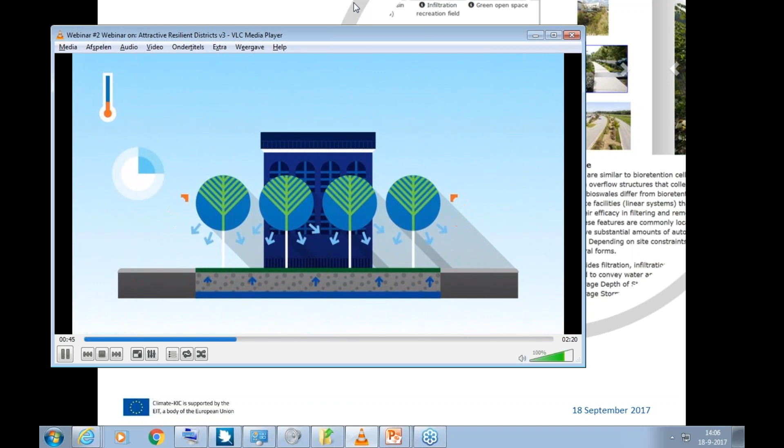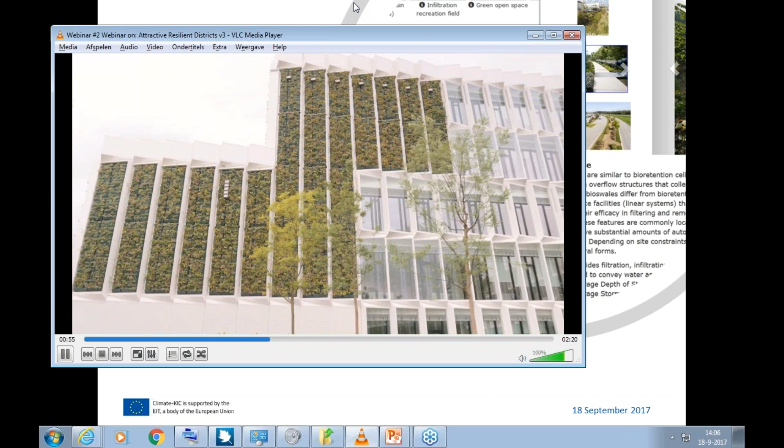Integration of nature into urban developments is increasingly recognized as one of the leading ways in which cities can be made more attractive, sustainable, and resilient. These nature-based or blue-green solutions use urban water and green in a multifunctional way, which makes them more effective than traditional single-function solutions. Their implementation and maintenance, however, requires renewed collaboration between stakeholders. Climate-KIC, through its funding of the Blue-Green Dream Project and the Smart Sustainable Districts Programme, supports development and implementation of a systems approach to attractive, sustainable, resilient, and cost-efficient urban development. Our approach enables districts to exploit the multifunctional potential of nature-based solutions in a systematic and quantitative manner. Importantly, our approach recognizes that there are multiple stakeholders with different needs and caters for these by optimizing the economic and societal benefits.

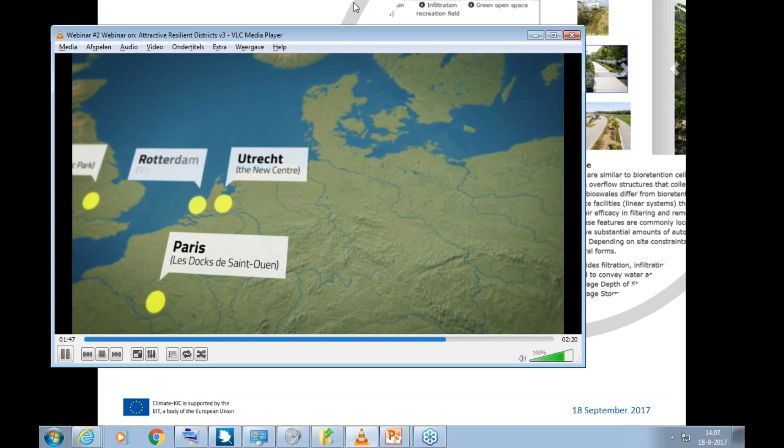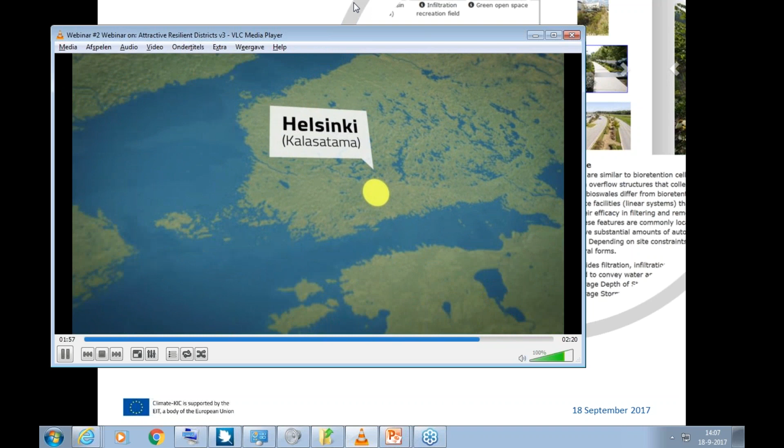Smart Sustainable Districts is a group of pioneering city districts working together to deploy and accelerate the knowledge, expertise, and best practice needed to transition to zero-carbon living and build resilience into Europe's cities. The SSD network offers support and services to create the dialogue, test the beneficial impact, and help realize sustainable district-led development.

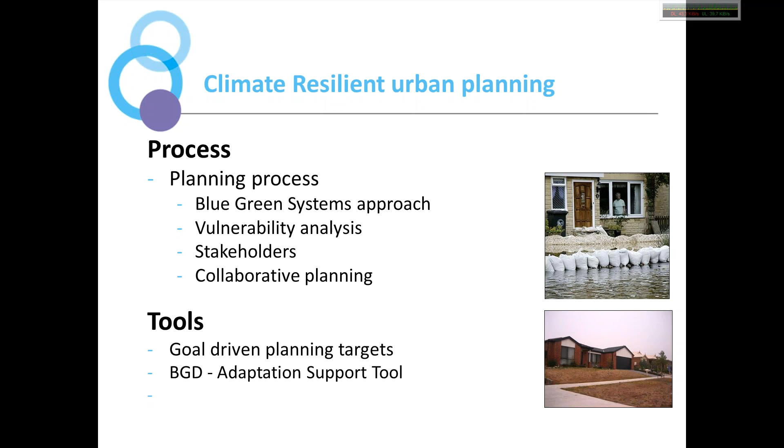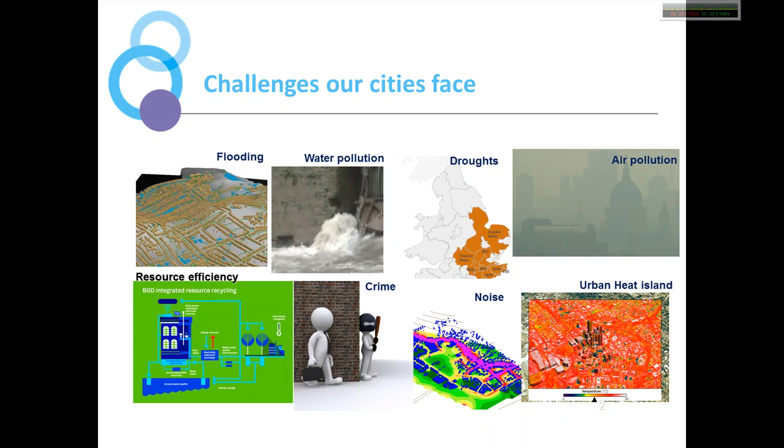Well, first, let's take a look at the challenges and vulnerabilities of the cities today. Cities face many challenges: flooding, water pollution, droughts, air pollution, resource efficiency, crime, noise, urban heat islands. All these hazards also create a certain vulnerability to the urban environment, and it's certainly a trigger that we have to work with to create more resilience toward these hazards, as nowadays we simply accept risks to a lesser degree than we did in the past.

One of the ways to do that is to use so-called blue-green solutions to create this resilience. And what are these blue-green solutions? These blue-green solutions include all sorts of urban interventions that use vegetation and water to achieve a sustainable and resilient environment, and in a way create cost-effective solutions.

Other names for blue-green solutions are sustainable urban drainage systems or low-impact developments, and even more different terminology is used all around the world, but we tend to use the terminology of blue-green solutions in this presentation. Well, from that moment on, Martin will take over to give a short introduction on the processes.

Martin? Thank you, Frank. Can you hear me? Yes, we can. Brilliant. All right.

So in terms of the process, how do you create a sustainable, resilient, attractive city? There's a number of challenges associated with this, and the first one is the fact that there's an incredible wealth of things that you can do. You can think of permeable paving, green walls, urban forests, retention roofs, and so on and so forth. And which one should you use and when?

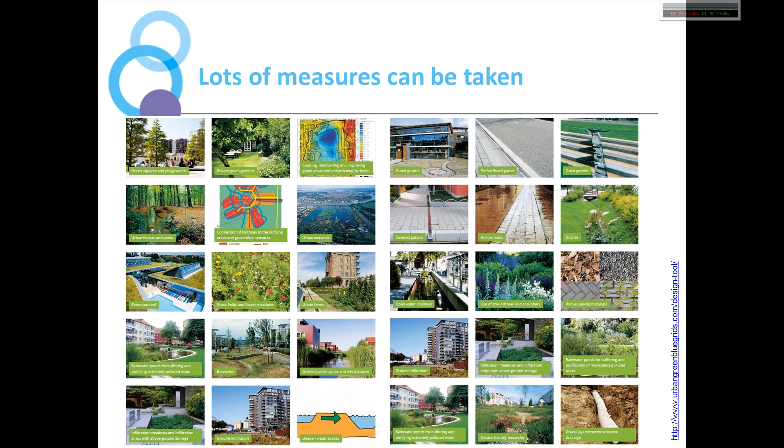Another feature of these blue-green solutions is the fact that a single solution has many different functions. If you think, for example, of a tree, it's not just nice to be around a tree and it looks nice, but it provides shading both to yourself and to the building. It evaporates, which cools the environment. It reduces flood risk via the water retained in the soil. It acts as a wind barrier and so on.

So this single tree fulfills this whole range of functions which are influencing the microclimate, the way you would mass your buildings. So how do you orient your buildings? How wide are they? They influence the indoor comfort. Your energy consumption is influenced by it, and it influences the outdoor environment quality. So you really need a system to get the best out of these.

And this system works in the following way: given a certain project you have, what solutions can you introduce in terms of nature-based solutions that give you more than the traditional monofunctional solution? So how can you use nature-based solutions in the best way so that you essentially have this whole range of ecosystem services that you satisfy simultaneously?

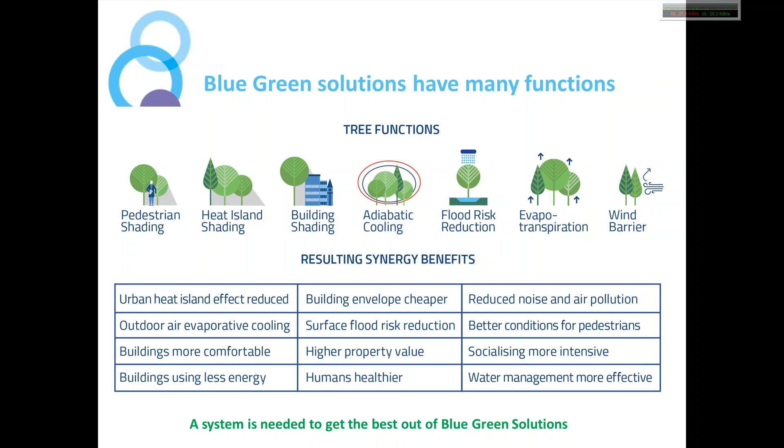So for that reason, we, during the Blue-Green Dream project, developed this Blue-Green Systems approach, which is essentially a framework for resilient, sustainable, and cost-effective urban development. So the main features are, as I already mentioned, this systematic use of synergies, right? So nature-based solutions, they provide many functions. Let's use them in a clever way so that the sum is more than the individual solutions.

Importantly, if you want to know whether you're doing a good job, you need to be able to quantify this. So that's an integral part of the framework. Then stakeholder involvement is a crucial aspect, because there's many different stakeholders for every project that we tend to look at, all with different needs and so on, and they need to be catered for.

So a final point of this approach is the fact that it's a pre-planning package as well. So in terms of wanting to design, say, new developments and so on, the earlier you start in the process, the more fluid the design is yet, the more impact you can make. Next slide, please.

So this systematic pre-planning methodology consists of a number of tools. So we've got the goal-driven planning matrix, where you systematically define what you need and what there is available in a certain area. And we've got interaction matrices, where you look at, these are the solutions available and how do they all interact, and how can you get the most out of them. Costs obviously are an important part which needs to be quantified, and then the climate resilience as well. Next slide, please.

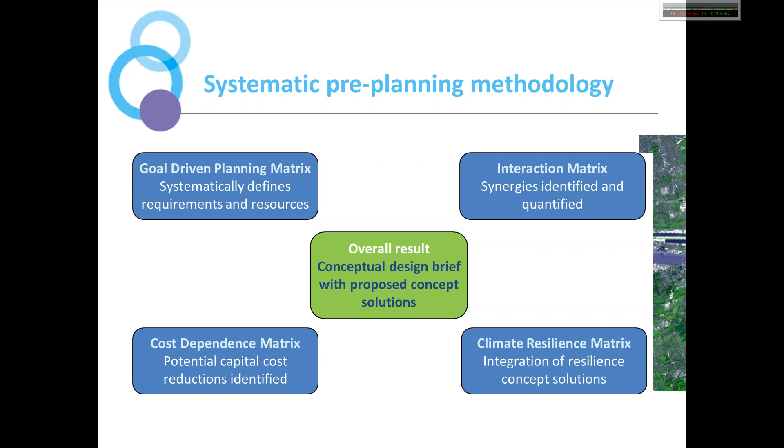So here is an example of this goal-driven planning matrix. So this is a case study from a city. There's a picture of London, but we've made it anonymous, so it's not London. So essentially, the city has a river flowing through it, and it's completely canalized, right? So the water just flows through, and there's very little function that the city derives from this.

So if we come into this city, we discuss with the city council and so on, and we start setting out goals. What does the city want to achieve? And for example, for this city, they wanted to improve the attractiveness of the city, both for citizens and for tourists, to make it more resilient to climate extremes and to reduce the reliance on cars in the city centers.

Right, so as a next step within this goal-driven planning matrix, these lead to targets. So what targets do you have that can make you achieve these goals? So the city said, well, we want to boost housing in the inner city. We want to reopen the inner city to the functions of the river, i.e. to let tourists and people just enjoy the river, except for just the transport of water, and so on and so forth.

So then the next steps are, what are the functions, the concepts, what facilities are needed to make these things happen? And then comes the quantification phase, because how are you going to know whether you've got a good solution? So we then systematically set up this whole range of indicators for all the targets that we have.

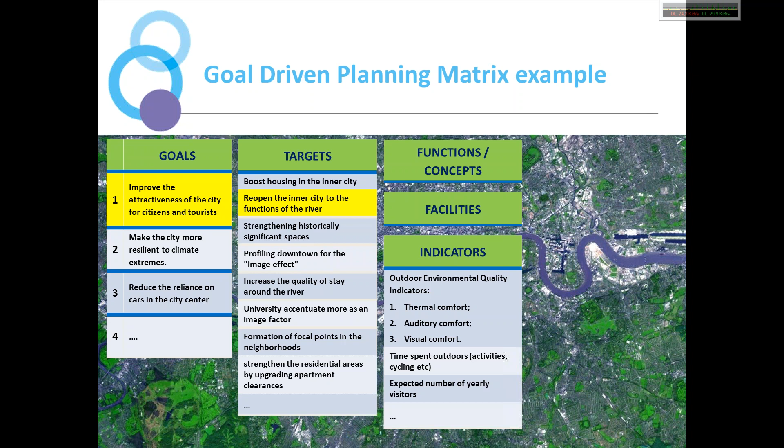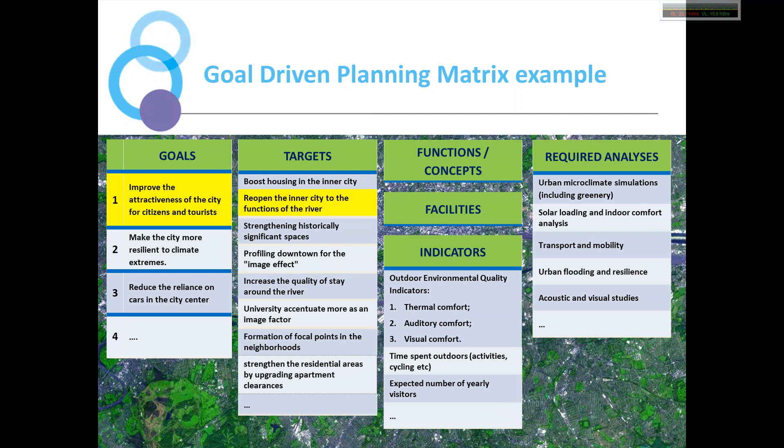So for this example, well, you've got outdoor environmental quality indicators like thermal comfort, visual comfort, etc. Maybe the time spent outdoors, etc. And once we've got these, you get an idea of the analyses that you require to do this. Next slide, please.

So what this requires and what the framework provides is then really a system to get experts together, and instead of everybody talking from their own expertise and from their own islands, it forces people together, and it encourages them to work together, maybe step slightly outside of their comfort zone, and really think about the city as a system, as an integrated object, and how do you make use of your solutions in the best way.

And this not only is for the experts, but of course, in the same way, it's for the local stakeholders. And with that, I hand back to Frans, who will tell you more about the tools that we've developed for this. Thank you, Martin. And let me continue indeed with the tools, if I can move my slides again.

Okay, well, the tools, as I said, we developed a couple of tools in the Climate-KIC program to support this planning process, and one of the most important ones is the adaptation support tool, a tool that is meant to make an inventory of what can be done in a specific area, where it can be done, and how effective that is. What we have learned in the past in all these workshops that we have been doing within SSD and outside SSD is that, first of all, it is very hard for the participants in this collaborative planning process to have an overview of all the solutions that are available.

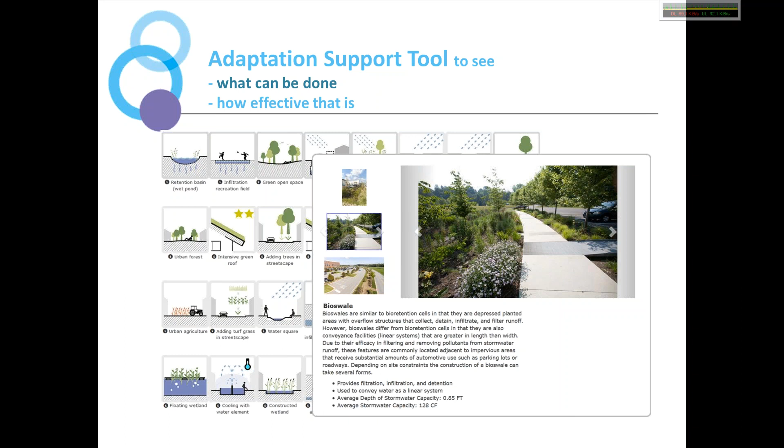And well, a lot of time is to be spent, I think, to get an overview, to learn about the potential solutions in a specific area, and to come to some sort of a short list, because, well, the tool contains a list of 72 different alternatives, so that is simply too much to deal with. And the first step is to make a short list of, say, 10, 15 solutions that seem attractive in a specific area in view of the problems and the vulnerabilities of that specific environment.

The next step is to find out where these solutions can be implemented and how effective that is. In the example that is shown here is the example of the SSD project in Berlin, in Moabit, where together with the stakeholders, this map was drafted on all the solutions that can be seen at your right-hand side, where they can be located in the specific area. In the right upper corner of the slide, you have the overview, the summary of all the results that are achieved due to this set of measures in the specific area.

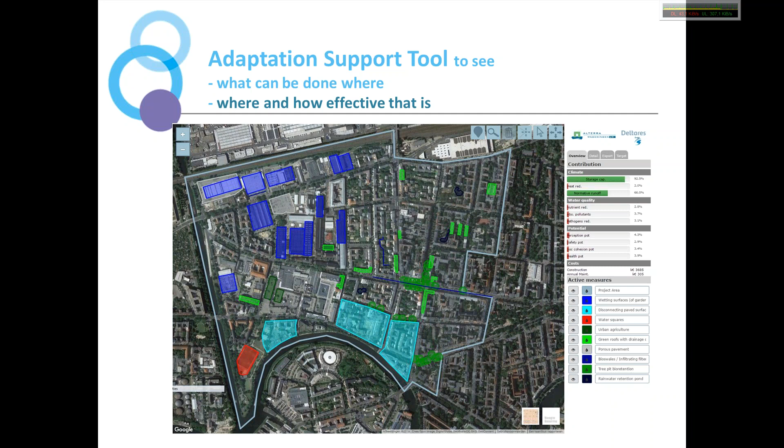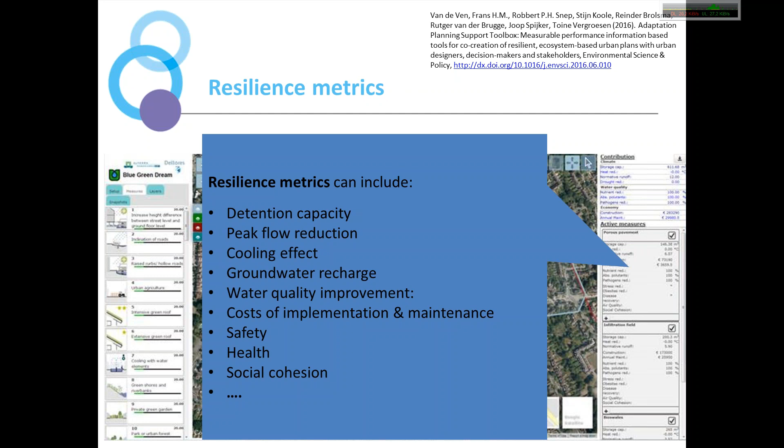But this is the type of dialogue that we would like to see in that very early stage of the planning process. So during that dialogue, the next question is what is the performance of all these measures? What are the metrics to quantify the performance of all these measures that are suggested in the area? And these resilience metrics could include issues like the detention capacity, peak flow reduction, the cooling effect of all these measures, groundwater recharge, water quality improvements, and of course the costs of implementation and maintenance of all these solutions, but also issues like safety, health, both public health and ecological health, and social cohesion. And maybe even for your case, you would like to see other metrics included as well, which can be arranged for.

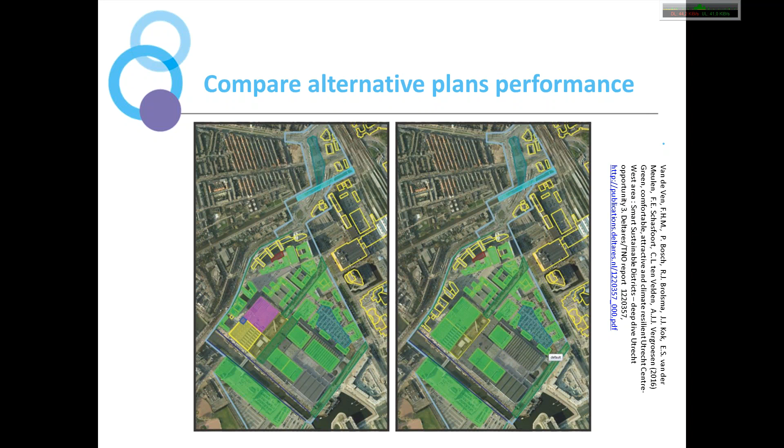The next step is, of course, to first of all draft different alternative solutions for a plan, like the solutions we have drafted by the end of 2015 here for Utrecht. And we will see what happened to these solutions later on in the presentation that Jeanette Heckhuis is going to give shortly. So this way, the tool allows you to compare alternative plans with their performance and to simply find out what is the most attractive solution in a specific area.

Once we did that, we have to analyze what the investments are, what the costs are, but also what the benefits are, because in total we want to maximize the benefits of our solutions, not only the economic benefits, but also the social and the ecological benefits. So the way the costs and the benefits are quantified are an important component of our analysis instrument.

Once we made this inventory of costs and benefits, the next question is, of course, who receives these benefits? In the rows, you see the different stakeholders in a specific area, in this case in Utrecht. And in the columns, you see the different variety of potential benefits that could be achieved by the different measures. And, well, this gives an overview of who receives most of the benefits and who is going to carry the costs. So this, first of all, contributes to achieve a fair distribution of the costs of the whole investment, but also what would be a fair distribution of the benefits. And in the end, this leads to a discussion on co-investment opportunities. Co-investment opportunities that are, of course, important to, in the end, realize this investment in the plan.

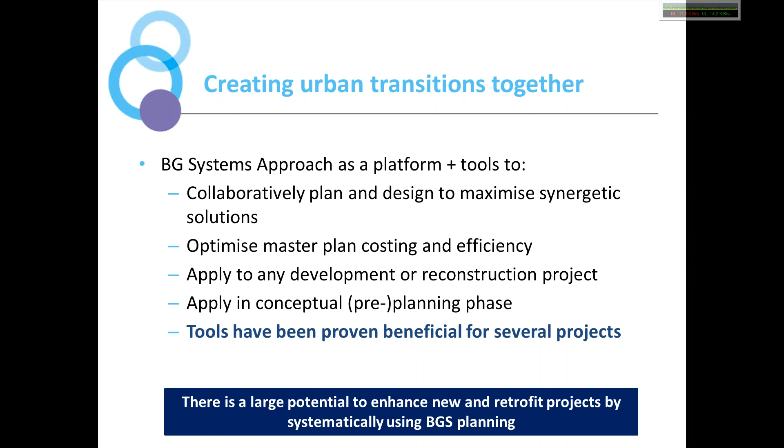Well, and all in all, the tools have been proven beneficial for several projects in practice, both within the SSD context and beyond. So it turns out that this approach is very helpful for the different districts. All in all, there's a large potential to enhance new and retrofit projects by systematically using these blue-green solutions planning instruments. That concludes our presentation.

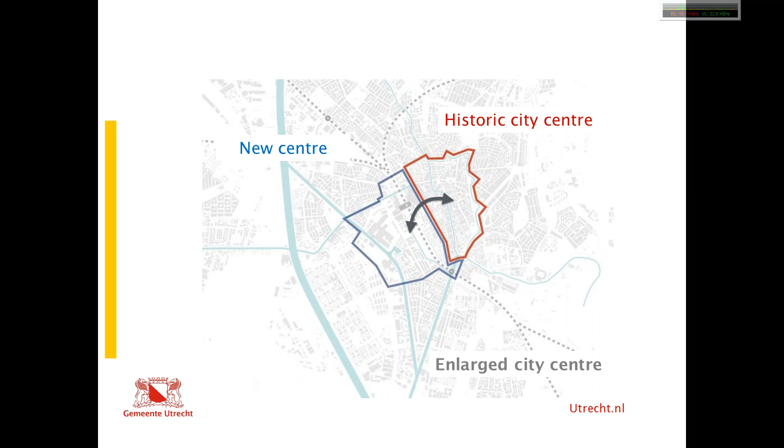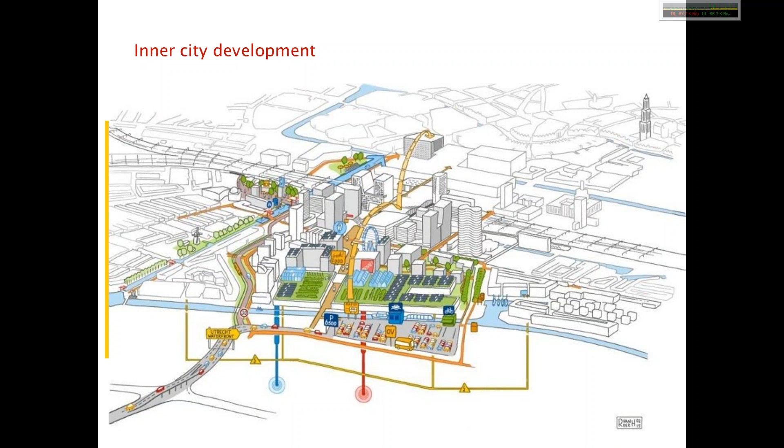The municipality of Utrecht has very high ambitions. We want to make a green and healthy urban environment. We want to make the area energy neutral, carbon dioxide neutral. We also want to have circular building. We want to build animal friendly. But those are only the sustainability goals.

We also have other goals, so that we have a mixed area for the inhabitants, so that there are not only rich people who can live there. To be compact and vivid. We also want smart mobility there because it's so close to the railway station. So there will not be much room for cars. And it also has to have a fine city structure.

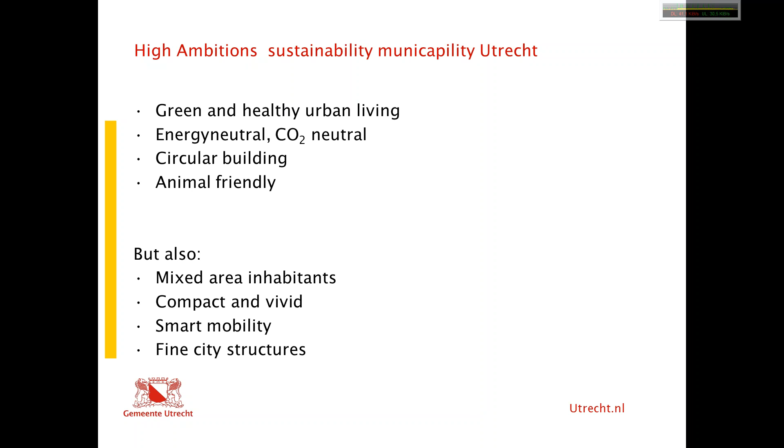Because of that, we made sure that we involved health and living, environmental and sustainability experts in our spatial planning and area development planning. We also want to do that because this is not the only part of Utrecht we are developing, so we want to use this information also in the other areas. We consider sustainability as a big part of building a healthy city. And combined with the fact that this is a redevelopment in the inner city center, these are very ambitious goals.

The SSD contributed to that with research, giving us solutions and ideas, assistance at city talks, giving us facts and figures to underpin our ideas, the solutions we are making and the decisions. And after this, we are now at the moment that the area vision has to be decided on by the city council, so we are a little bit waiting for that, and in the future we're going further with the city planning in detail and tenders.

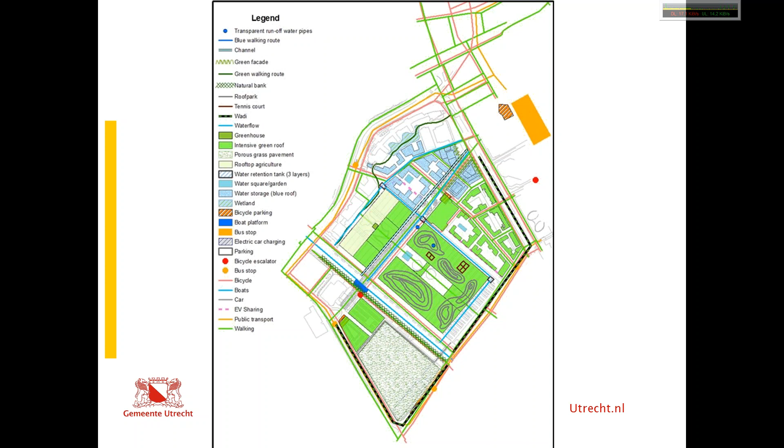This is the sketch we made for our part of the development. The research done by the SSD made it possible for the municipality to make informed, underpinned decisions for the area vision. It also made clear what we have to do to infiltrate and use all the rainwater falling in this area. It has made it clear to us that it's possible to infiltrate enough water, even with building in such a high density here and with a lot of streets. It also made clear to everyone involved in the process, in our organization and outside, that heat reduction is necessary so that it will not be an urban heat island, and that it is also possible in this area.

So the research did make a contribution to the fact that we now have parks in the plan, that we were able to think and discuss about adding canals in the area. It made very clear that large trees are necessary for all the different qualities. It made clear that green and water are important issues at the next planning step and in the tenders that will follow.

And now something about the parks. They were in our initial ideas from the green specialists within our organization, but sometimes they were in and sometimes they were out. And because of the research of the SSD and because of the participants in the city talks, they did come back in the planning and are now a solid part of the plans.

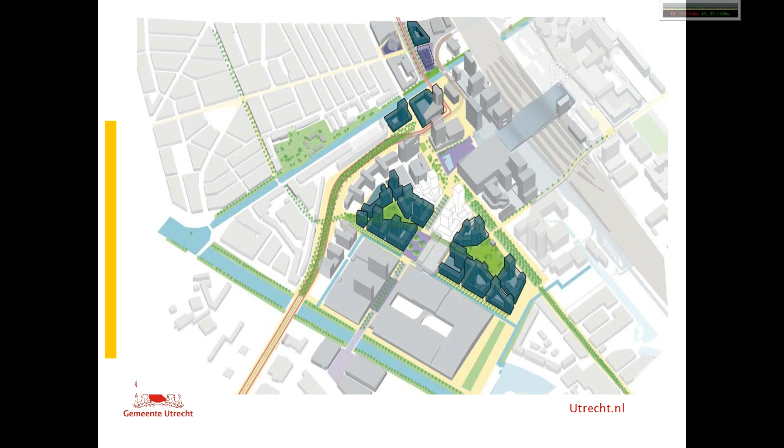We divided the area in different plots. This is one of the plots. The SSD also did research on that. They calculated the contributions to the water retention and the heating. This was a parallel process. The SSD did research on 3 different scenarios. And in the middle of finishing the calculations on that, the municipality came with her own preferable scenario.

That happened because there is a lot more involved than just green and water, all the other aims we have for this area. And also the municipality was trying to speed up the process of decision making because we have elections in the coming year. Luckily, SSD was flexible enough to also calculate this 4th scenario. And of course, because it was a parallel process, we also took in aspects of their research already.

As you can see, we have green roofs up to 25 meters of height. And on the higher roofs, we want to have a combination of PV panels and water retention. And in the big picture of the whole area, you could also see the canals, the parks, and the green-blue links.

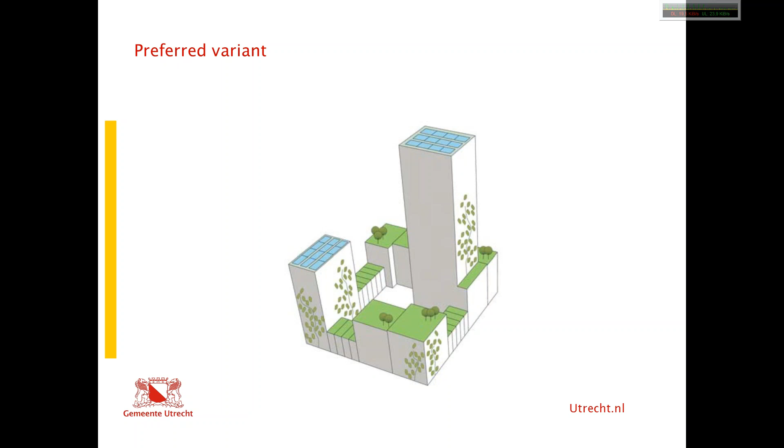As I said, we made an area vision, and in this we sketched the whole vision we have for the area, the headlines of the developments, and the criteria for further development. But we are only at the start at the moment. The City Council has yet to decide. That will be at the beginning of November.

We have to have more detailed planning. The zone planning has to start. We have to plan the underground very carefully because it will be very crowded in the underground. And there has to be some more detailed research done by the SSD. And after all that is finished, we have to do the tenders when we give out the grounds to the developers.

Then I will end with one of the tenders we already did. It's at the edge of this new development area, but the ambitions we have for this whole area, we wanted that to show in this tender already. All the participants at the tenders were very enthusiastic. They also showed high ambitions. This is the proposal we chose for further development.

It's called Wonderwoods. It's a forest in a city. The greenest building, the architect of that is Stefano Boeri, an Italian architect who built a similar building in Milan, but this one is adapted to the Dutch climate. The other building is designed by MVSA architects. It's also a very green building.

This building has a high rate of water retention. The buildings need even more water than the annual rainfall in the Netherlands. They are designed to also use the water of a huge nearby building. We still have some issues to solve to go from a sketch development to a real development. But the aim is, of course, to keep this idea of a vertical wood inside the city intact.